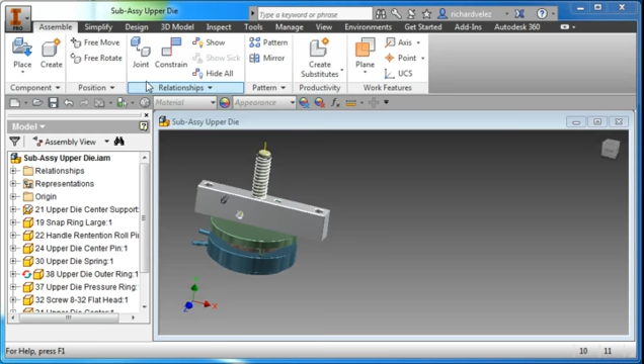In this video, I'm going to show you how to create this subassembly. It's subassembly upper die. It's part of the button maker project. I'm going to start out by making sure you're signed in to Autodesk 360. I'm already signed in. Also, you're going to want to go to Projects and verify that there's a check next to your button maker 360 and hit Done.

Start out by creating a new assembly. And I'm going to bring in all the parts needed, come here to Place. And I'm going to bring in parts 19, 21 through 22, 24, 30 through 32, 37 through 39. I'm going to bring them all in. I'm going to select the first part, hold the Control key, and select the other parts 21, 22, 24, and so forth. Then selecting all your parts, you're going to hit Open, set your parts down, and hit OK.

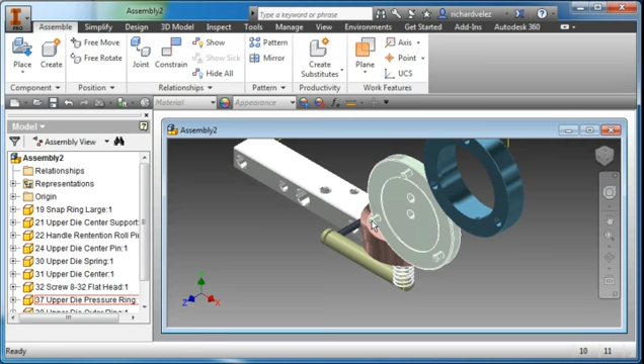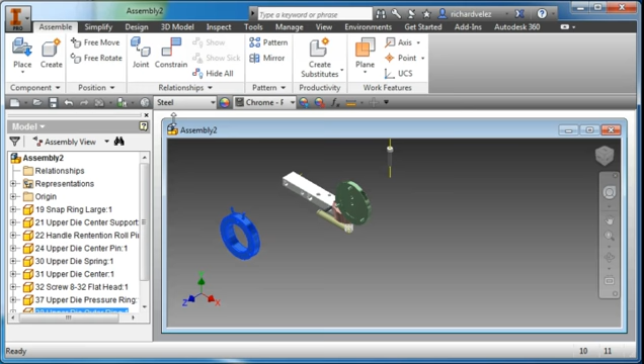I'm going to start out by placing this part here. I'm going to select it and then drag it over. I'm going to do a free rotate of the part. I'm going to highlight the part. Let's select free rotate, and I'm going to rotate it around such that it's in that orientation. I'm going to bring in this other part over here and do a free rotate and rotate the part around such that it's in an orientation like this.

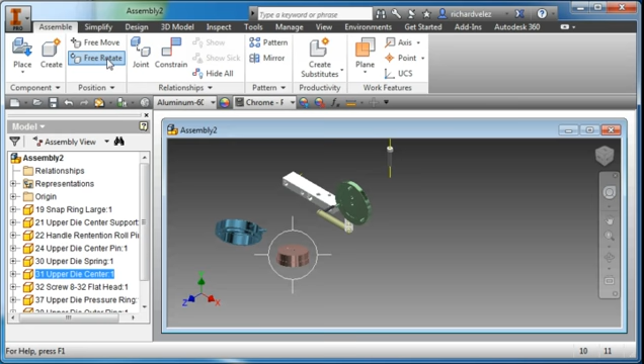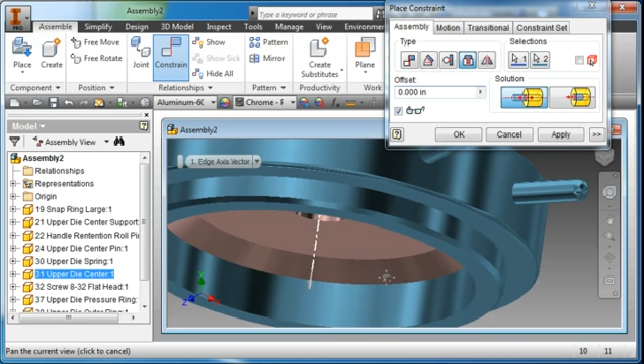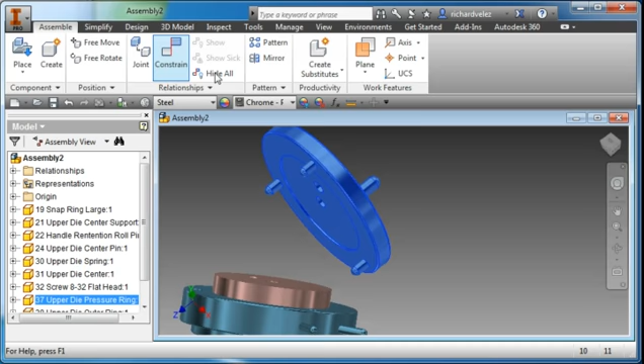Let me create a constraint. Zoom in here to do an insert command, and I'm going to select this diameter here. Zoom in and select this diameter here. Hit apply and OK. I'm going to next place this part here. I'm going to bring it over here, approximate location. Zoom in. And do another constraint, another insert, and I'm going to select this circle here, that diameter, and I'm going to select this diameter, hit apply, OK.

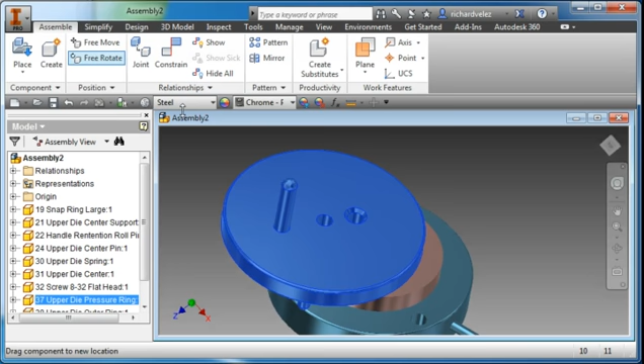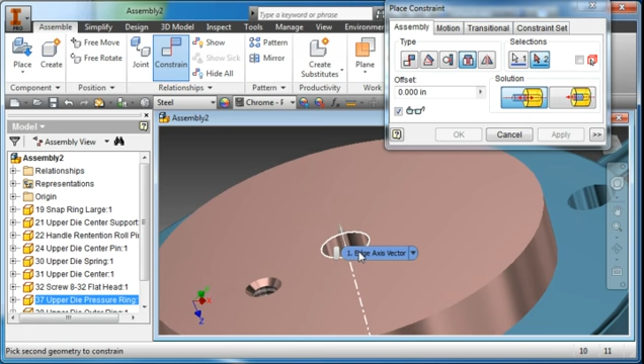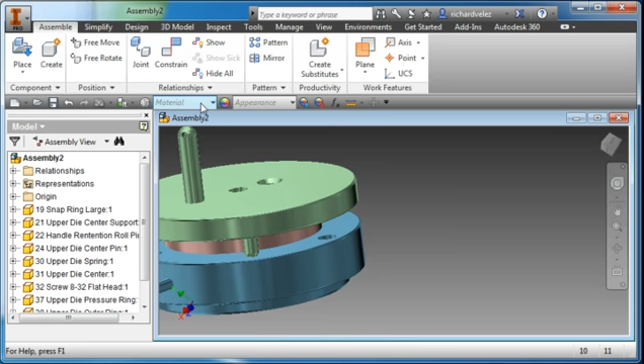Move the part out of the way, do a free move. Now I'm going to do another constraint, and I'm going to insert this center hole to this center hole here. Hit apply and cancel. I'm going to do one more constraint. This is going to be a mate. I'm going to mate this axis here with the axis of this hole here. Hit apply.

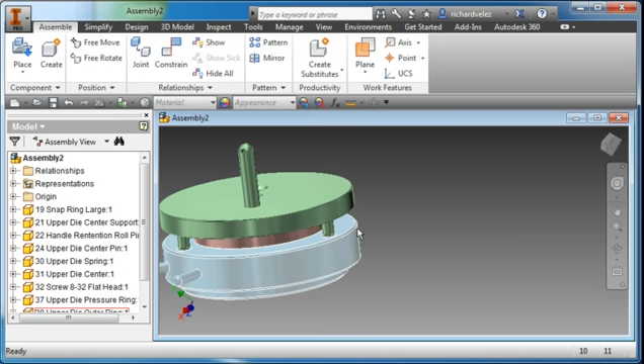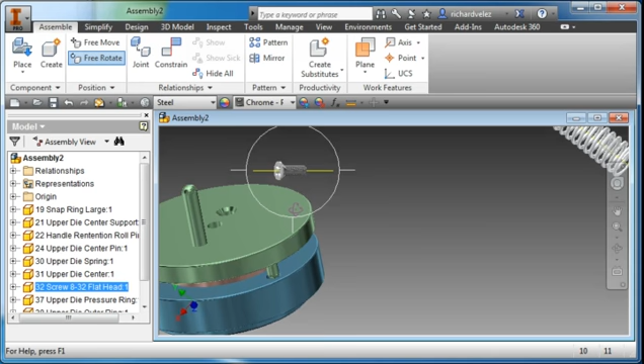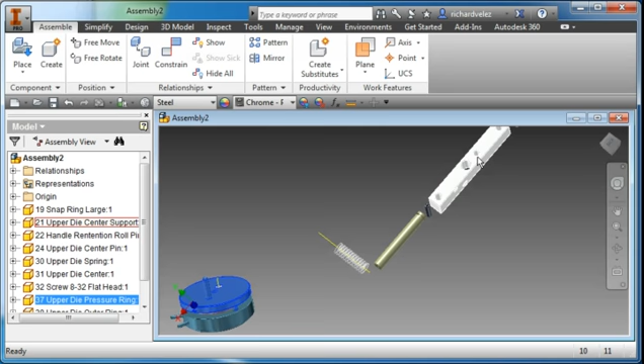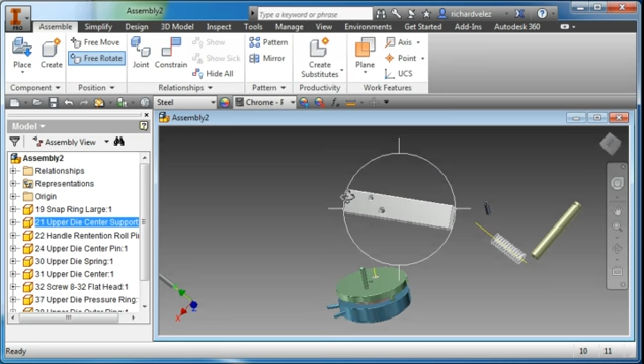Bring this part in. Next I'm going to place this screw, bring it here, do a free rotate, rotate it around. Do another constraint, and this is going to be an insert. Let's select this outer edge here and align it with that outer diameter. Flip it around and apply, cancel. I'm going to bring this part over. Do a free rotate. I'm going to position it like this, with this small hole that I'm highlighting located here in the upper left.

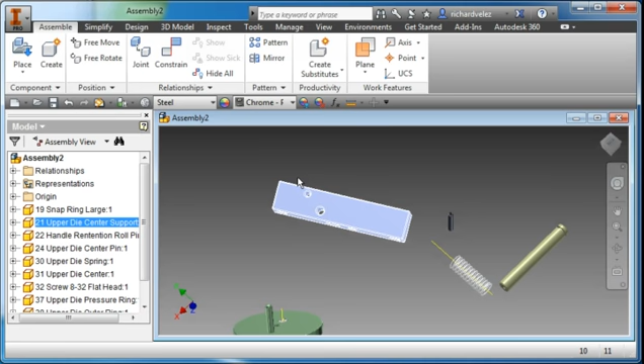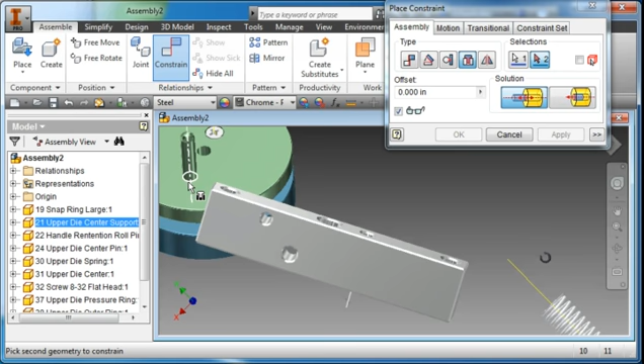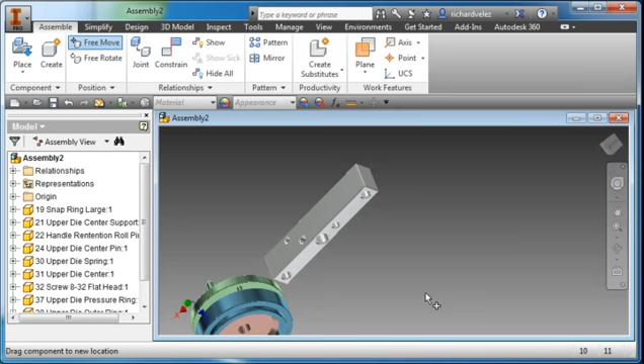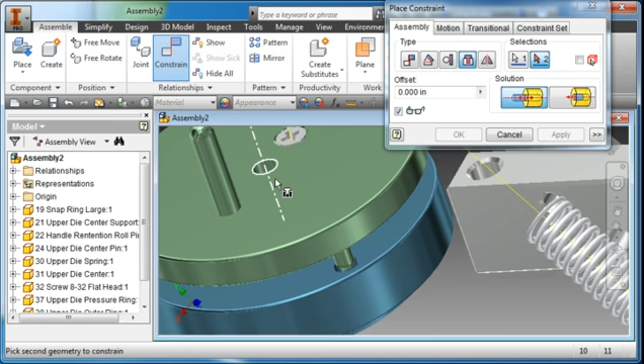Do another constraint. It's going to be an insert. And I'm going to insert just like that diameter. And I'm going to select this diameter here. Hit apply and OK. Now do a free move. Move the part out of the way. Do one more insert, and I'm going to choose this larger center hole, the outer diameter. And I'm going to align it with that diameter there. Hit apply and OK.

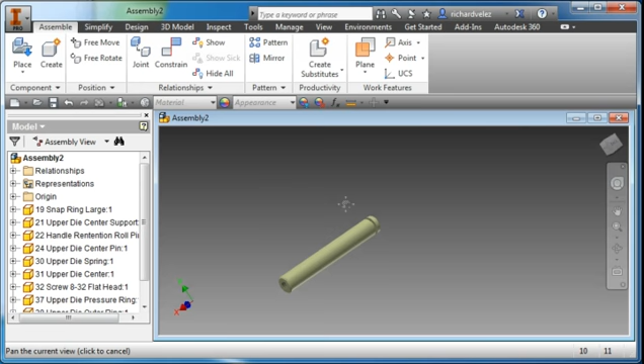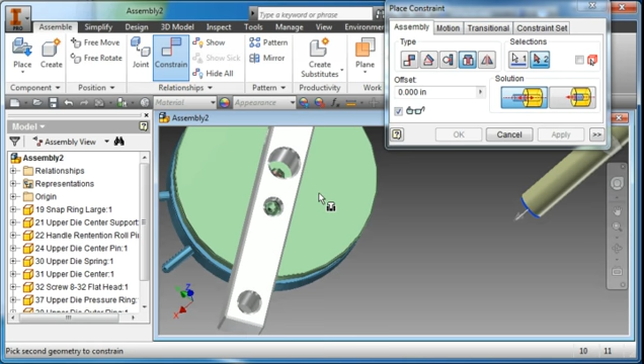I'm going to cancel. I'm going to bring this part in a little bit closer. Zoom in. To do another insert command, constraint, insert. I'm going to select this diameter there. Zoom in, rotate around. I'm going to select this diameter here, hit apply and OK.

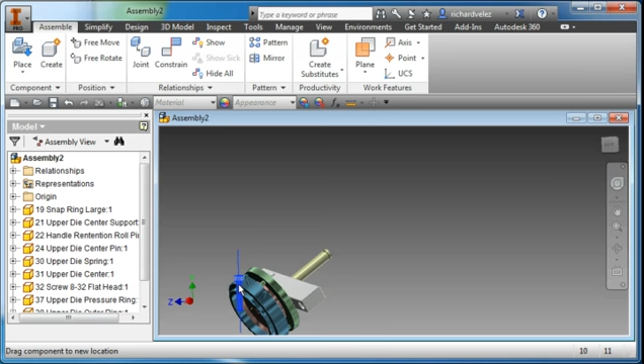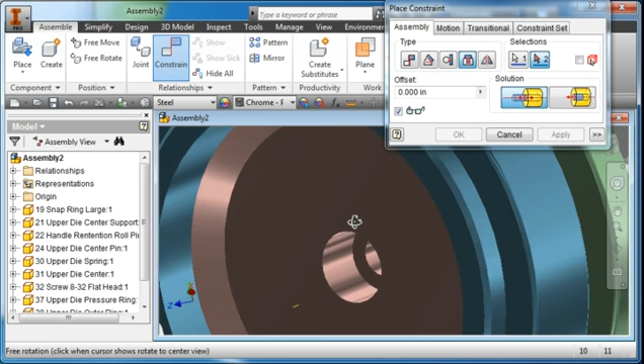I'm going to bring this part down over here. Do another constraint, another insert, and I'm going to select this diameter, and I'm going to select this diameter here. I'm looking down the hole and selecting this diameter here. Hit apply and OK. Select this part, bring these parts, hit cancel. I'm going to bring these parts in a little bit closer.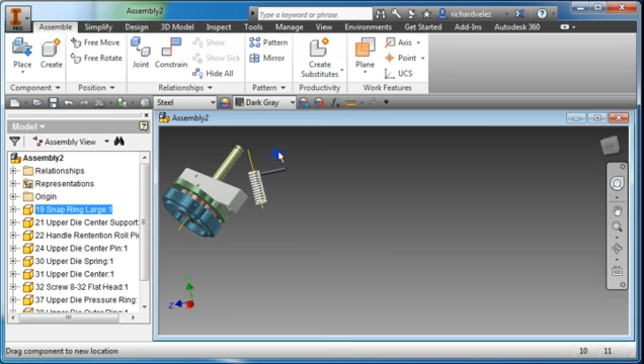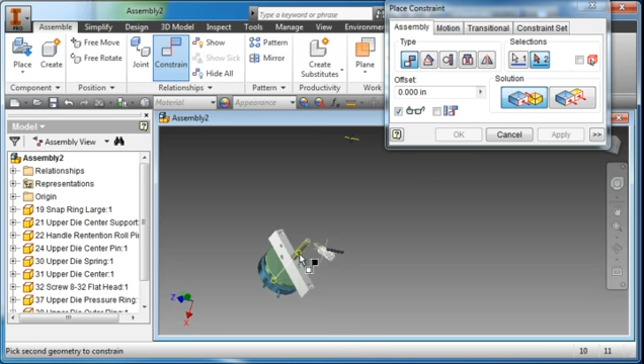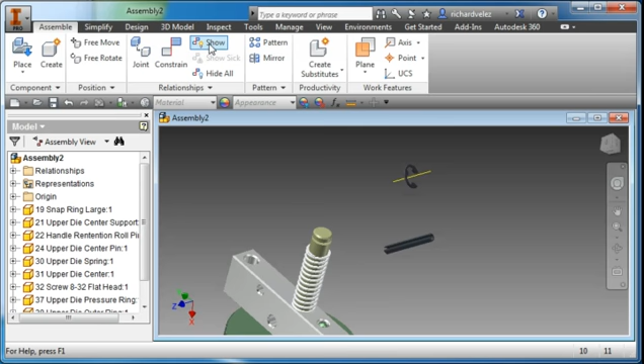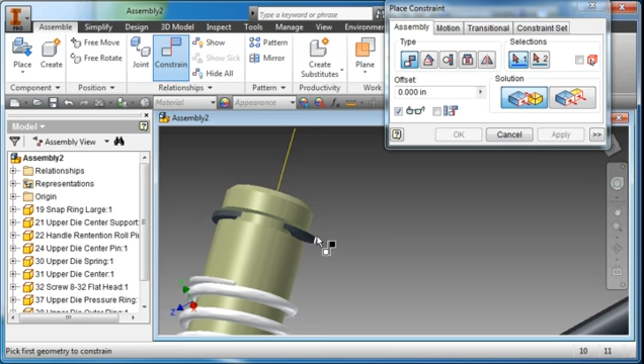Do constraint. This time I'm going to do a mate, and I want to mate this surface here with this surface here. Hit apply. And then I want to align that axis with this axis. Hit apply. Okay. Do another constraint. It's a mate command. I'm going to mate the top of this surface with this surface here. Hit apply. Move the part out of the way. And this time I'm going to align this axis with that axis. Hit apply. Cancel.

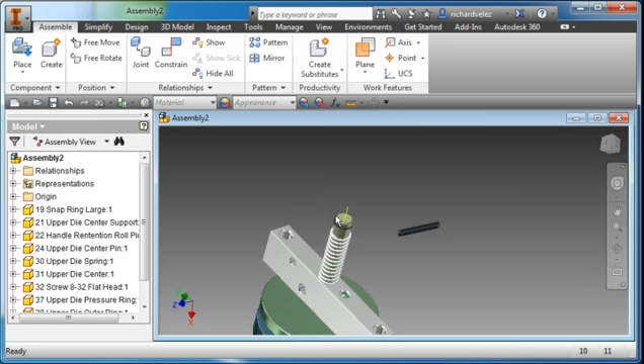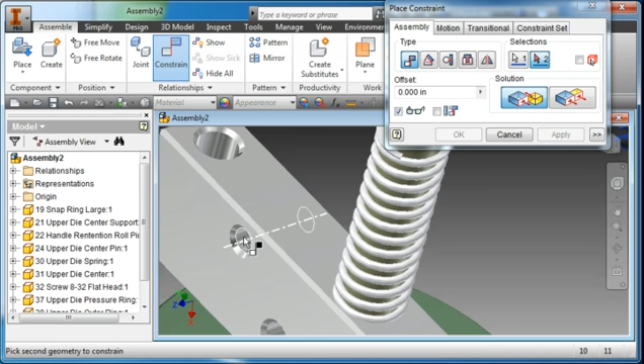Just one more part to insert. I'm going to do another constraint. I'm going to align this axis. You have to make sure you choose the axis. You can see the dotted line, not the edge, but you have to choose the axis. Choose that axis, and you're going to insert it into this axis here. Hit apply. Now I want to align it in the center.

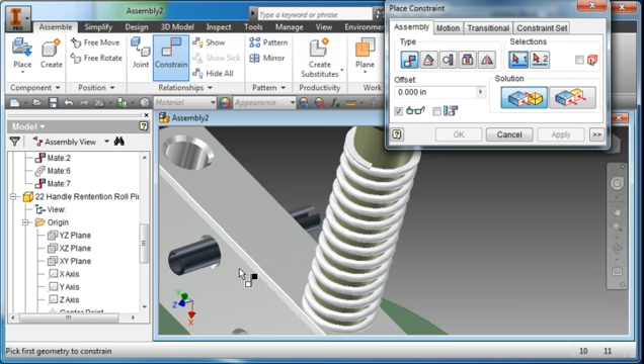I'm going to do a mate. I'm looking for the center of this part here, the upper die support, and that's this plane here. I'm going to align that plane with that plane here, this XY plane. Hit apply and OK. And you notice that now the pin is centered in the block. And if I adjust the length of the pin, because I aligned to the work planes, it'll center itself. Hit OK and cancel.

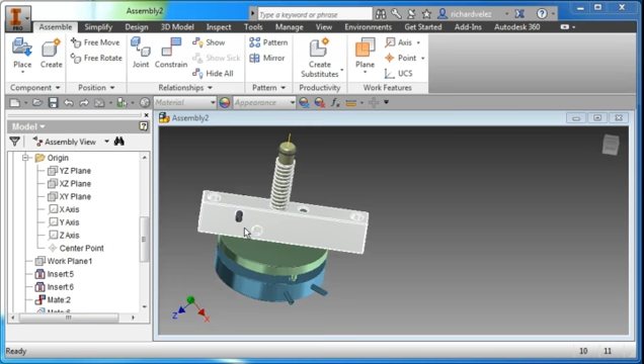As I mentioned earlier, I did not ground my first part because I was rotating parts around. But at this point I do want to constrain my part. I'm going to constrain this. It has a flat surface and I could use this as a front. So I'm going to create another constraint. This is the upper die support. I'm going to create a mating constraint, and I'm going to mate the center point of the upper die center support to the center point of the top assembly, the origin. Click on that.

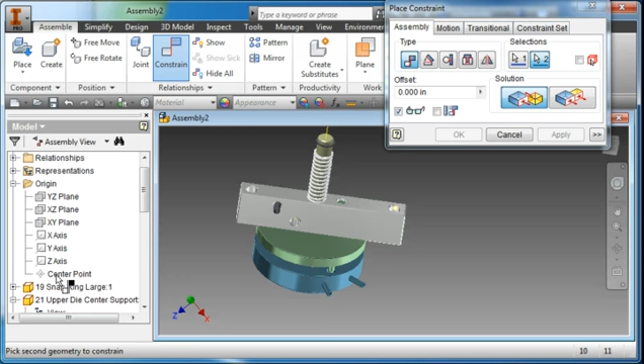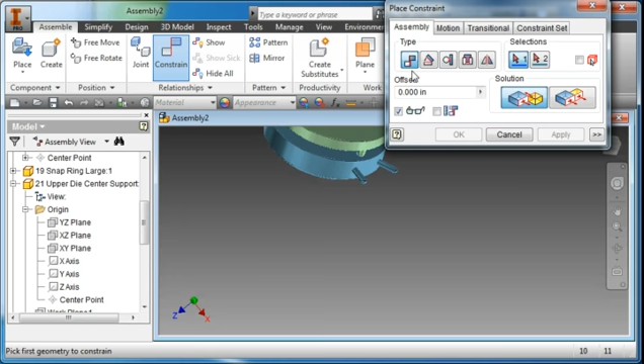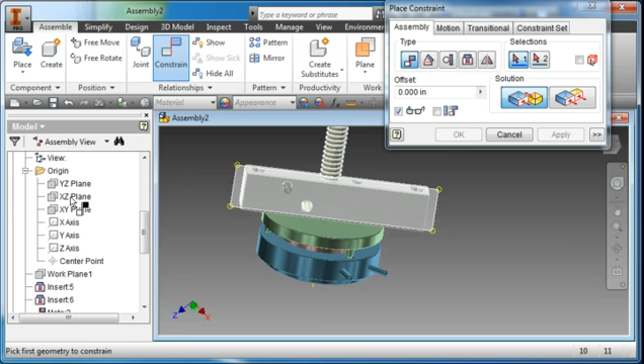And so now that the origin of this part and the assembly are coincident, I'm going to do another constraint. I'm going to do a mate. I'm going to constrain the XZ plane of this upper die to the XZ plane of the assembly. Hit apply. And I want to constrain the XY plane of this part, the upper center die, to the XY plane of the assembly. And hit OK.

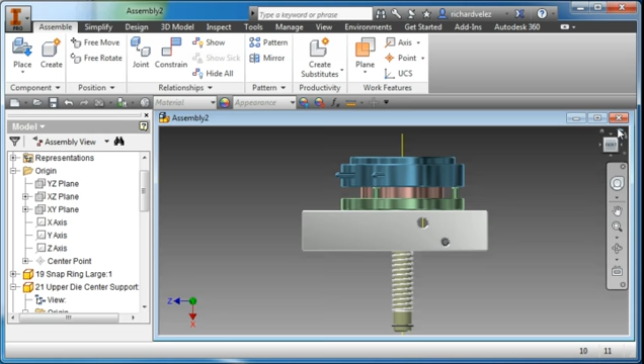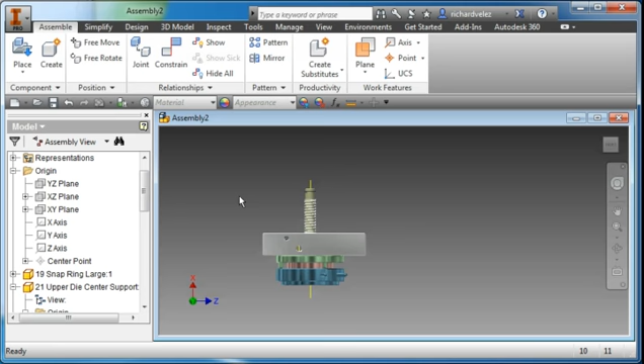So I'm going to view this by this face here, and I'm going to come here and set current view as front, and I do that just to orient the part. I'm going to rotate it around like that. Now I'm going to do the command again. I'm going to set current view as front, and now that is my front assembly, and all my planes are aligned. You're going to want to save this part as subassembly upper die, and if you're done, you could sign out of Autodesk 360 here.